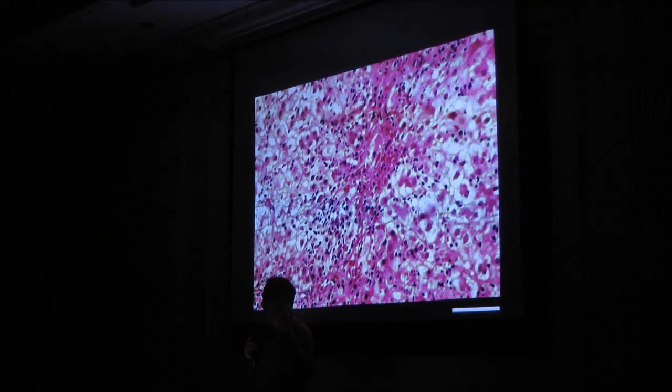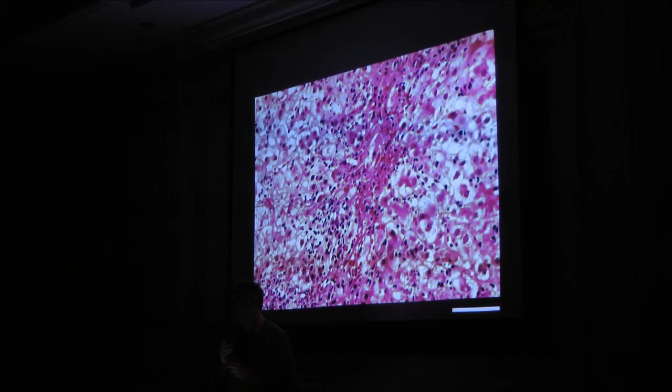Okay? So, what Prishtina needs, what Kosovo needs, is what happened in Barcelona. We got a lot of help, a lot of collaboration from people like Frank Gehry. All the international architects came to us and helped us to collaborate. So I said yes to come and to collaborate. So we are a liquid, remember. You do something wrong in Kosovo, it happens in Barcelona, it doesn't work. We are linked, we are one. In the civilization of empathy, we are one.

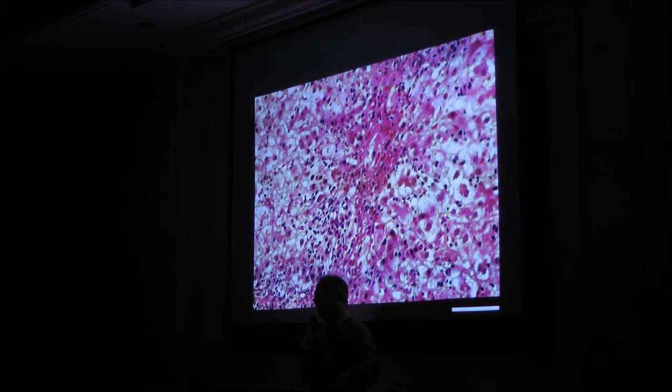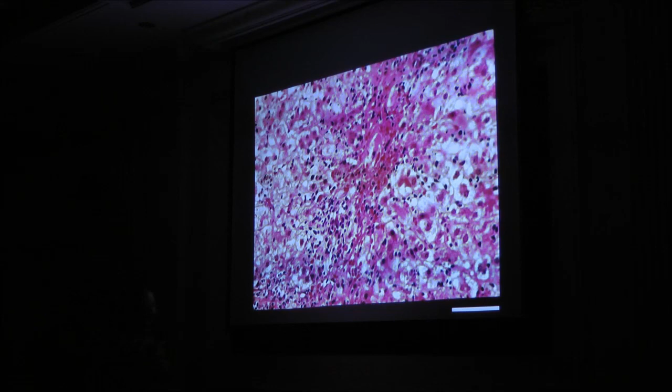When Mr. Putin closes the gas to Germany, the stock market of Barcelona goes down. When someone finds children working in China for Nike, it goes down in California 15% in the stock market. It happens in a click. It's very fragile, but it's beautiful. It's transparent, it's democracy. We like it. So, I like him.

The question to you is, if we are a liquid, what is the role of you in that liquid? I came here because this week is a revolution. It is the first time. You have settled a foundation to break ground and change. And a generation can use the platform of the foundation to push the city to change and to change politics. So, I like him because he's a positive virus. Okay?

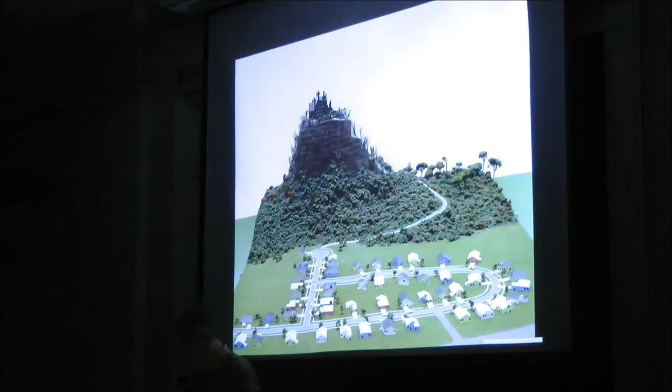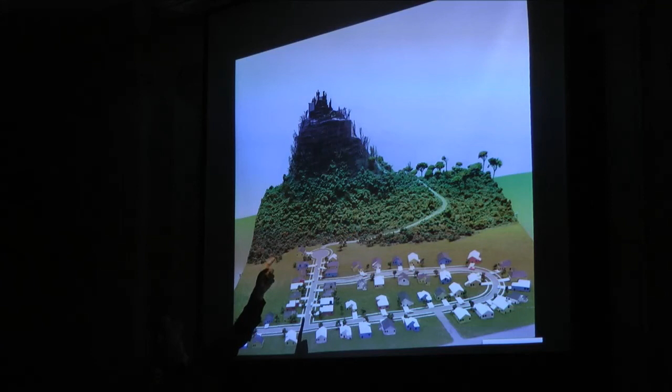I'm suggesting, you know the movie, right? This was his house, his studio, and this was the city. This is like Truman Show. This is Tim Burton and this is Disney. This is IBM and these are the hackers. This is your studio. This is your country. This is this lecture and this is outside. Okay? But this is my studio and this is Barcelona.

This is IKEA. Okay? This is IKEA and these are my carpenters. This is a fab lab of MIT and this is IBM. We need the system. We hack them, they contract us. We need the system, the system needs us. Strange, but interesting. Excuse me?

The bad news. Okay? The bad news is that it's funny, but in Spain we build too much. This is in the north of Barcelona, this is in Empuriabrava. It's built, it's not a movie. Okay? Be careful what you do with your coast. There's an architect doing these houses from the front, from the back, from the right, from the left.

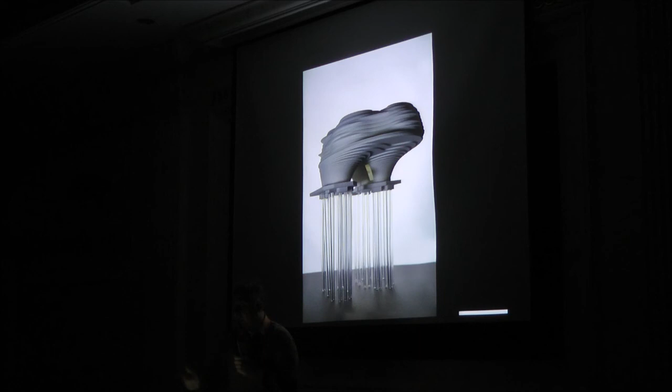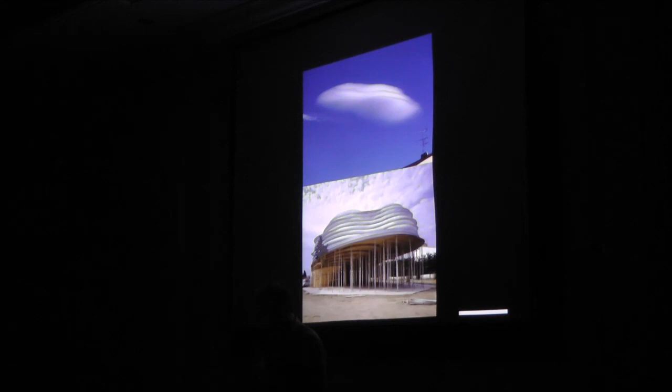That's the wood form. Using parametric design, we're not wasting any wood. Again, more machines. That's a Saturday morning. We are sending files to the machine and the machine is printing. No negotiations, no meetings, no discussions, no convincing. Just do it. One Saturday morning. Little time, not expensive. Done. Just do it. So what's next?

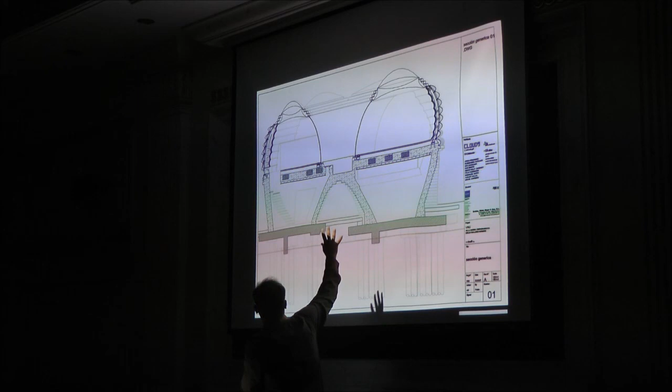How should we continue? So we started with this idea of a cloud. We have beautiful clouds in our region, in our territory. So we have all this technology. We have a winter house and a summer house. We have a daylight and a night light. We have concrete structure. We have curved glass. We have a steel structure. We have a ceramic skin. We have Teflon cushions in the roof. Steel structure, Teflon cushions, and ceramic skin to perform north elevation and south elevation.

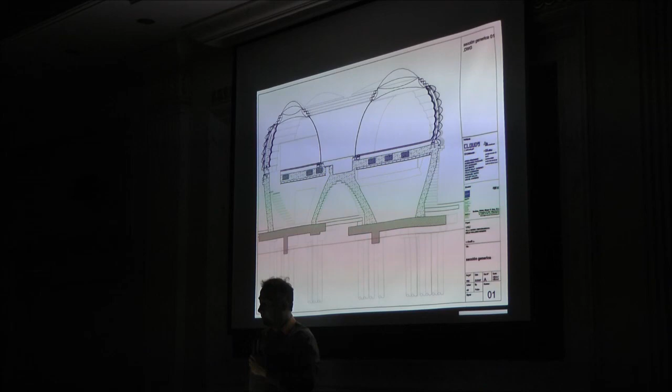It is about concrete, projecting concrete. We are architects of making. I was here with the people of the office shooting concrete. I was here for 8 days shooting concrete. Not designing concrete, shooting concrete. Okay? It's making. We are architects of making.

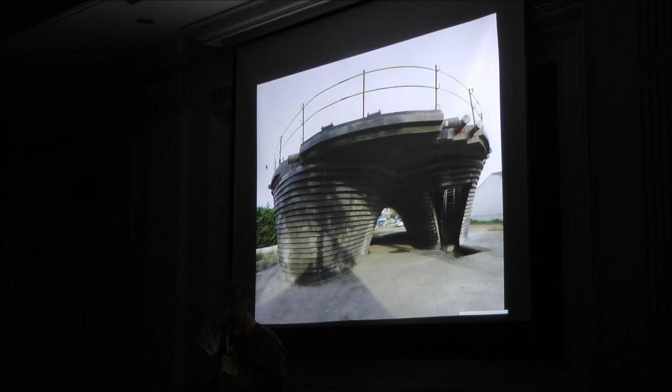Making what? So like our bones and our structure, we have water and installations, and all the pipes are inside our body, the same as inside our house. We have tension like our bones and our structure. And in order to fly, we need this post-tensioned structure that we are shooting. It's a little bit Batman house. Okay? It's important about resolution. So when you do complex geometries, you have to address very well the idea of resolution. What is your resolution? Here is 15 centimeters.

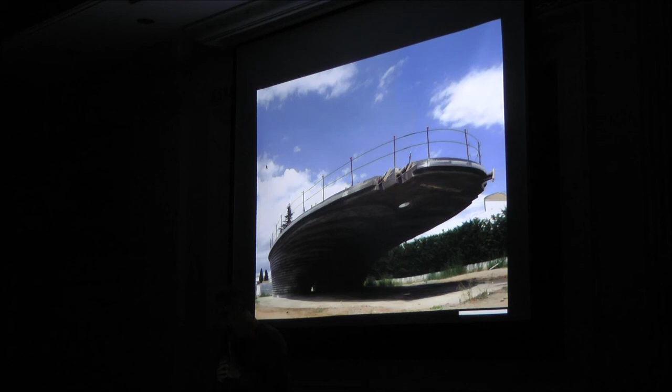To fly. Is it a house? Is it a boat? What is it? So what should the door be? We have a pop culture, and we know that doors can move. So in the Mediterranean culture, the door opens in the morning and closes in the night. So we have a hydraulic system at the bottom that moves the door, 80 kilos, using reinforced concrete. Very light concrete, only 2 centimeters.

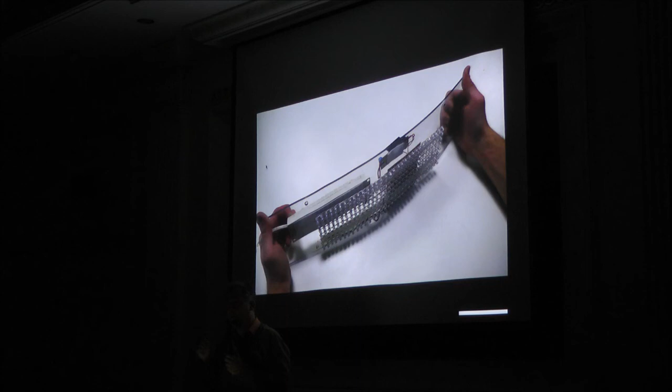But there's one step which is unique and innovative in terms of using translucent concrete. In the back we have an LED panel with an Arduino computer where I can send messages to. Okay? Hello. We are not at home. Who are you? You are not my guest.

It's about complex systems and complex architecture. People ask me, where is Enric getting all this energy from? Well, when I was back in the school in Barcelona, I had Enric Miralles as a teacher. And Miralles was telling us, do you see this croissant? What are you doing? It's breakfast. Yeah, do you see this croissant? Yes. It's not a croissant, it's a building. It's a croissant, yeah?

So for 3 months we were freezing the croissant in the fridge at home, we were cutting the croissant, we were drawing the section of the croissant, and the croissant has an inside space, has a structure, has temperature, has energy embodied, is a material, has humidity levels, and maybe has people living inside like microbes. If it's 1 day later, for sure. So it's a building. This is our generation. We can go to our clients and say, it's not a croissant, it's a building.

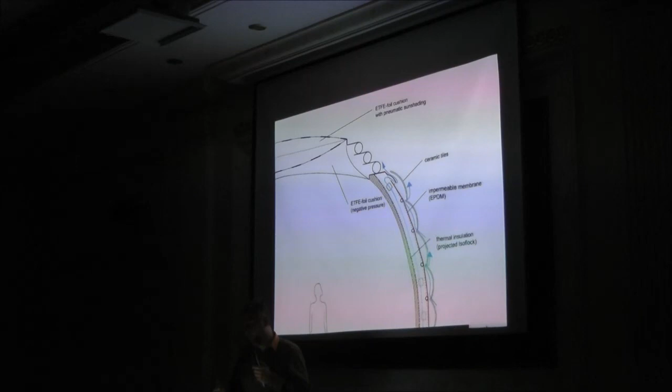What about the ceramic? So in this moment we invited Frederic Amat to join the design with us, an artist, a ceramist, and Toni Cumella, both designing a curtain wall which operates with a strong chimney of air, really warm and heavy. We're using parametric design, they are all the same but not the same. So before building, I suggest you to do that. Do a simulation, do testing, do prototyping.

What you see here is a projection of Villa Nurbs in 3D projected over Villa Nurbs. Villa Nurbs digitally projected over Villa Nurbs itself.

Yeah? You need coffee? Do you need coffee? No.

So, if I have a camera inside my 3D model in a position X, Y, Z, and I know the angle of my camera, and I put in the same X, Y, Z position a projector with the same angle of projection as the angle of my camera, agree? I render this and I map this render over itself. Yes? So, that night we were shooting the mesh of the ceramic before building with the client, and I was showing, there's a window here. Oh, cut, reduce, enlarge, scale. Shoot. No. Another.

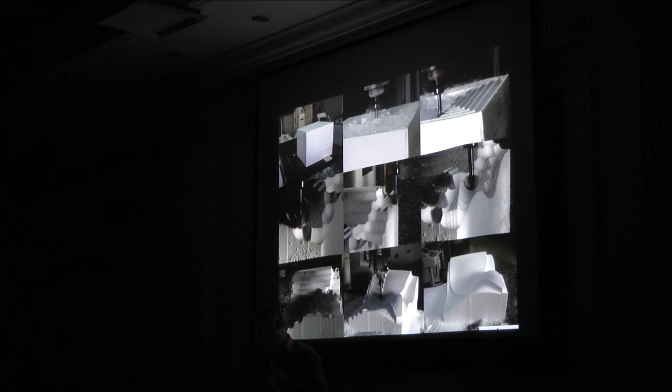We have complex systems like ceramic, like molding, so we are able to do flat surfaces, unfold, back to fold. They're all the same, but they're all different. One mold, one piece. And this is the artist creating a mesh. He's doing landscape, painting each one. So architecture can host art and must be a platform to host contemporary culture.

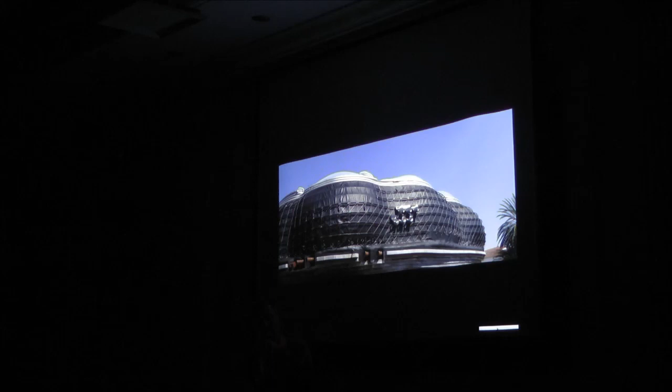This is a skin of ceramic. So ceramics are not screwed to the wall like our skin is not screwed. Our skin works in traction and it's wrapping our body. So the skin is wrapping the building, the body, the house with cables. This is a monster.

Frederic said, "Are you sure you want me to design the skin of a house?" Yes. "But I will kill your architecture." Yes. So, again, you are my friend. Are you sure you want me to do this? Yes. Does the client agree? Yes. Are you sure you want me to do this? Yes. But I will kill you. Yes. Are you sure? Yes.

Yes, just do it. I was at the opening in Sao Paulo of the big dome that Oscar Niemeyer did with the artist Tomie Ohtake. You know this white dome? And there is a red artist sculpture inside. I was there at the opening. So the friends of Tomie were entering through this door and were saying, "Wow, art is much better than architecture." Okay? And I was like, of course.

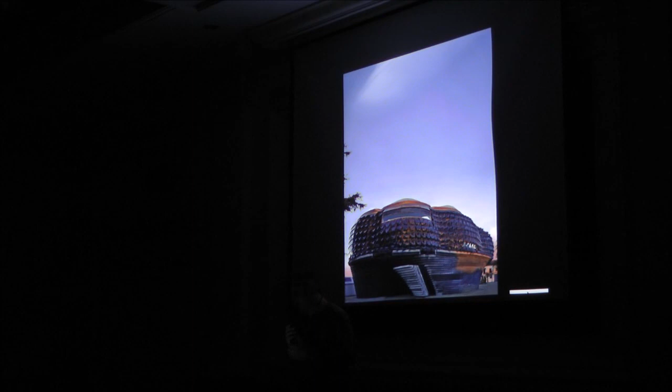But in this door, the friends of Niemeyer, Oscar, were also coming in. "You use art so well. Architecture wins." So it's possible to do architecture and art win-win. It's possible. It's risky, but it's possible. If we do that, we will host society. We will welcome society because society needs a platform to express.

It's imbalance, but it's strong. It's where arts and crafts meets technology. It's difficult, but it's possible. So what about the North elevation? Here we are using Corian, one element, one byte, one object, all the same, all different, and we are using machines.

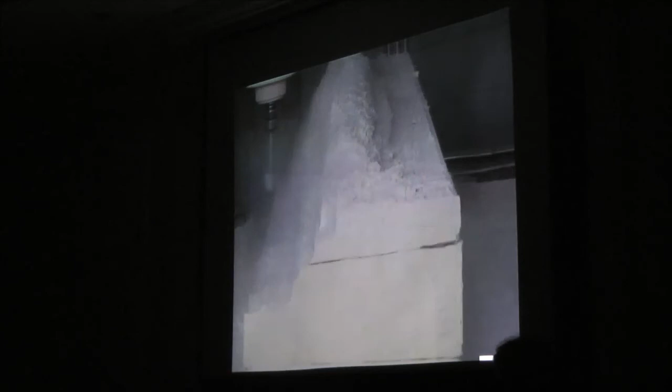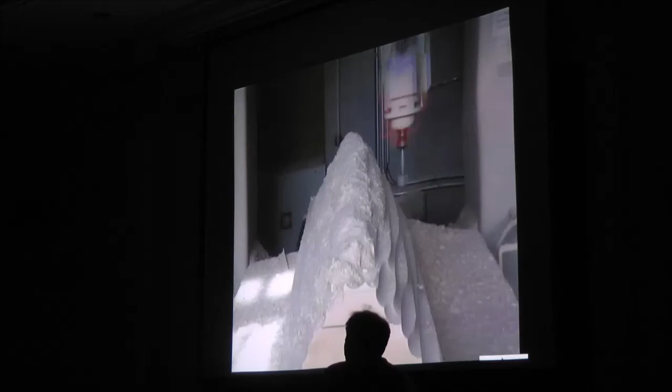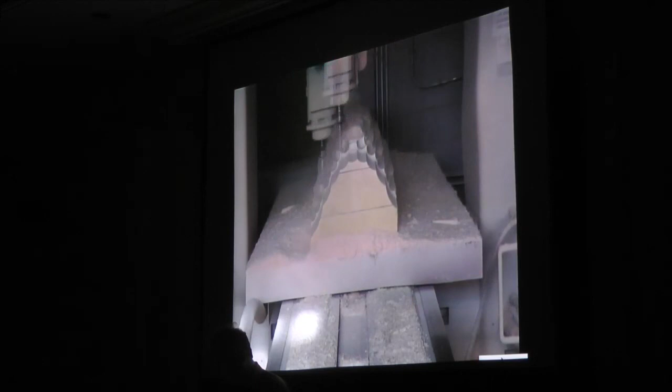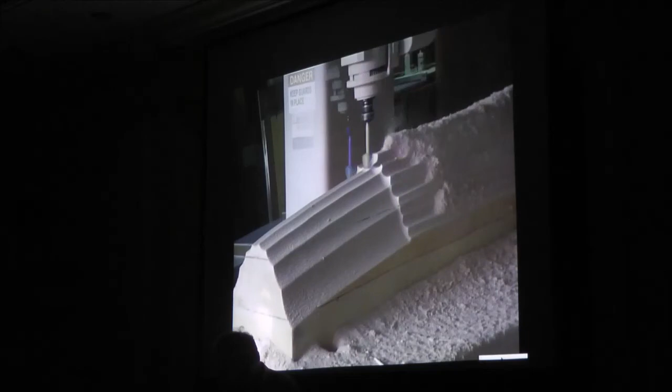No discussions, no meetings, just do it. I do a drawing, I convince these people, I explain, I have a meeting, there's another meeting, who is late, another meeting. But we are taking the responsibility to build, we are designers and makers.

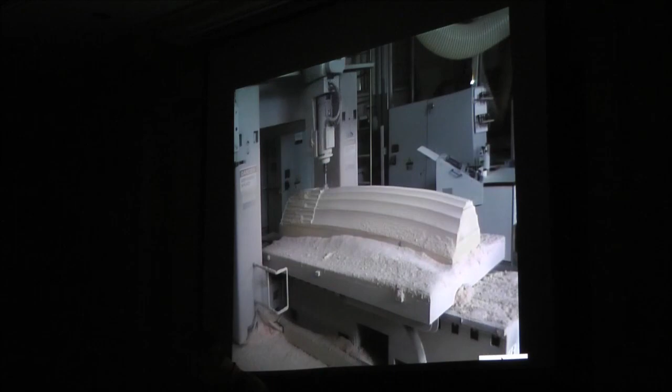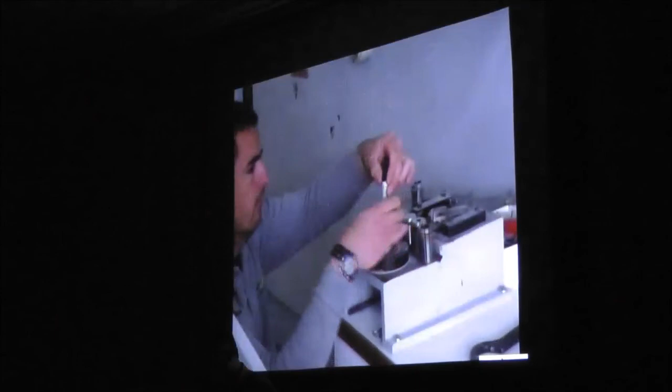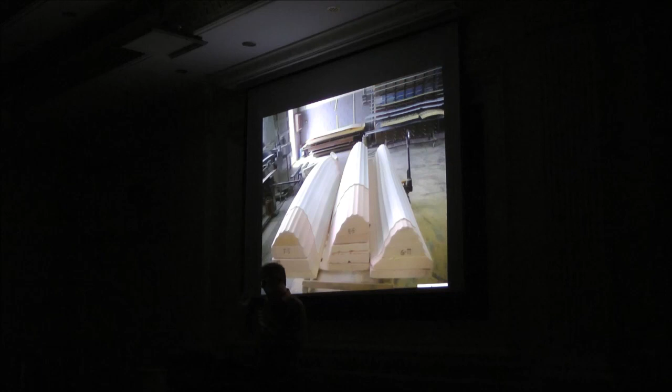Just do it. 6 millimeters of Corian, translucent, to produce the cloud. A cloud. Using cables, translucent. Half of the neighbors, they say it's landing. The other half is saying it's not landing, it's taking off. But in this place, it's an attack. It's a positive virus.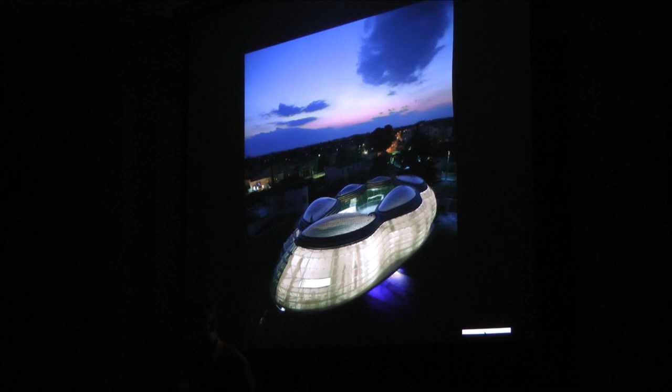People come to us and they say, we didn't know this is the future. And we say, it's today. It's not the future. Today technology, today architects, today clients, main material, it's today.

Can I have a little bit of lights? Just a little bit of lights. You guys know this is Barcelona, yes? Who invited me? You invited me, right? No, less lights. Where are you going? Less lights. No, little lights. Little. Only this one, no, only the center one. You can find. Sure. Just make it. Over here. Come. Oh, okay. This is like on TV. Do you find it? No. Try. You will find that one.

So, you guys know Barcelona? You know Gaudí? Okay. Smart building. Congratulations. So we were talking about that. So basically, you guys know this building, yeah? You know Gaudí? Okay. And who knows Jujol? No. Okay. So this is the work of two people. It's collective authorship. It's a retrofitting of an existing residential building. There was a building. It's a retrofitting. It's a new skin, a new roof. And Gaudí said, I'm going to put some masks on the balconies. And he did. All the Japanese go to Barcelona, they film, oh, Gaudí. They don't understand anything. Okay?

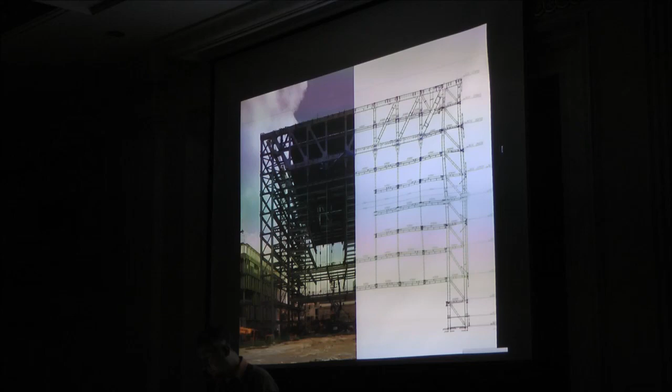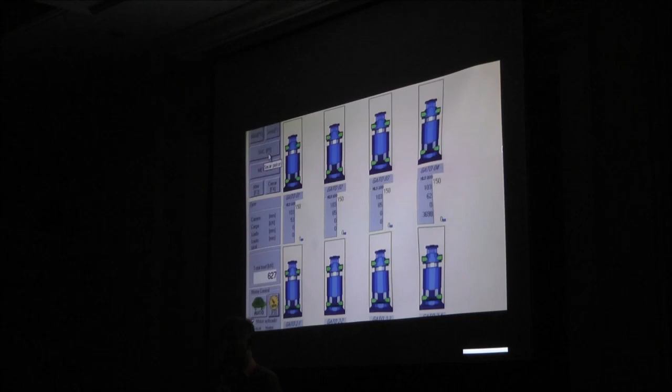So, all the floors are hung from this big truss. Okay, you see that. This is when we started. This is the star architect, but it's not true. The real star is this guy. And the real stars are these 8 robots working together to balance the structure. So we are lifting the structure using cables. This is 320,000 euros cheaper.

Normally you do a secondary structure, then you build your building on top, and then you break the secondary structure down. What we did was we worked 3 months down, so no problems of security, everybody's safe, 4 meters high, and in 1 day, all up. These robots are cheaper. Less time, less risk, less material, less structure. So the construction companies are ready for this challenge of digital architecture.

These are the nuts, what we call flowers. We are against this. This is a centralized system. If this collapses, the building collapses. Imagine a wall with 1 cell phone. Imagine a wall with 1 computer. Imagine a wall with 1 structure. We are distributed. So what's very important is that we move from centralized to distributed. This is a distributed structure. Our building is a distributed structure.

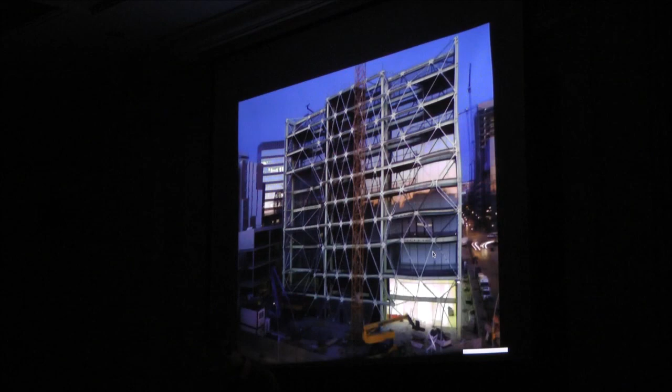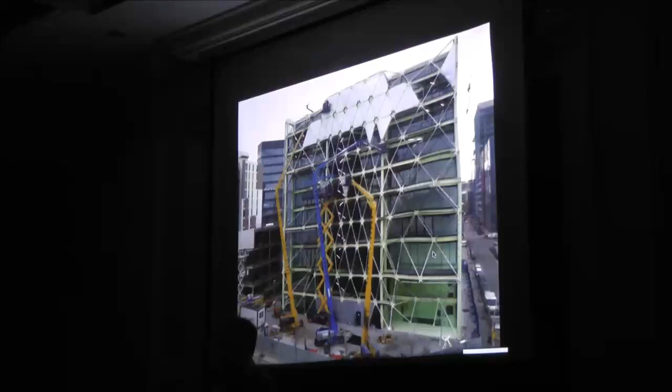So, we are building a second skin to protect the building. This is exactly 4 people using Teflon. The thickness of Teflon is 200 microns, it's 0.2 millimeters. You invite an architect to come here with a building that the thickness is 0.6 millimeters of material. Are you crazy or what? That's what's happening. You are inviting an architect with 0.6 millimeters of material. That's the thickness of our architecture.

So energy. We are in global warming. It's bad news. It's good news for the tourism and bad news. When I was a student in high school, summer was August. When I was a student of architecture, summer was July, August, September. Now I am a father with children. Summer is 10th of May, 11th of October. I'm not talking about crazy Germans on the beach of Barcelona in May. No, I'm saying the beach is full and we are all there swimming. So if someone thinks global warming is not happening, sorry.

In 2000, the line of desertification was in Morocco. In 2010, the line of desertification in terms of temperature went up to Malaga. Part of Spain is now, in terms of performance and weather and temperature, Africa. In 2020, this line will be near Catalonia, in the Ebro river. Half of Spain will be a desert in 7 years, in terms of temperatures.

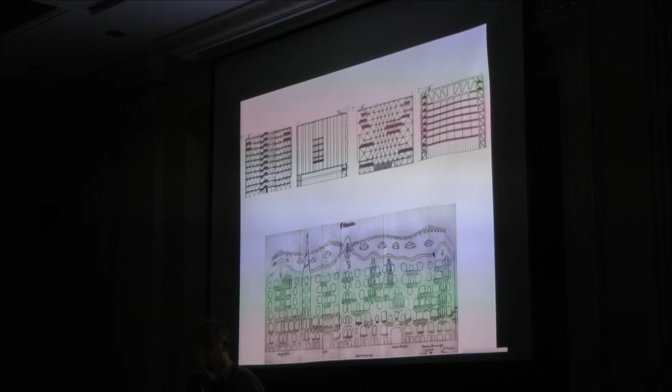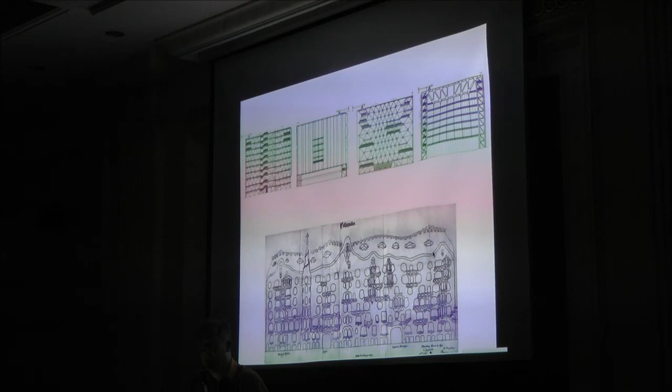We have a new code of construction in Europe, which is saying save energy 15%. It's a new code, it's 3 years old. All countries are doing it. Please save 15% of energy by law. But Kyoto is 20%. So the new law is less than Kyoto.

Imagine. And when all the prime ministers meet in Copenhagen, they are going to sign the protocol of Kyoto. Me, as an architect, I think, dear Zapatero, dear President, sign. And then he says to me, but your buildings are 15. Why do I have to sign 20? So I say, no, I don't do buildings of 15. I'm going to do buildings of 70 to make sure you sign 20.

Okay? So what you will do in your buildings is a movement so that your country does it. If you don't do it, don't complain about it. They're not going to do it.

So energy in the Mediterranean, in Spain, means this. 80% of the consumption of a building is air conditioning. This is our winter, 2 weeks. Heat is peanuts. Air conditioning is 80% of the consumption. If we want to bring down the energy by 70%, I have to attack air conditioning.

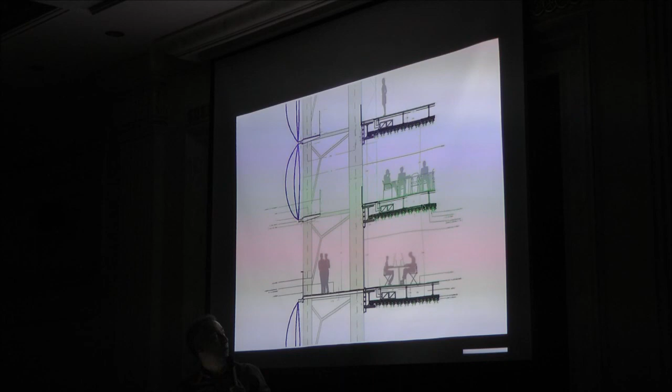So I have created a double skin, glass and Teflon in the front. I like the light to go through, but not the heat. So if the light goes through, I don't need artificial light. But if the heat doesn't go through, I don't need AC. No AC, no artificial light.

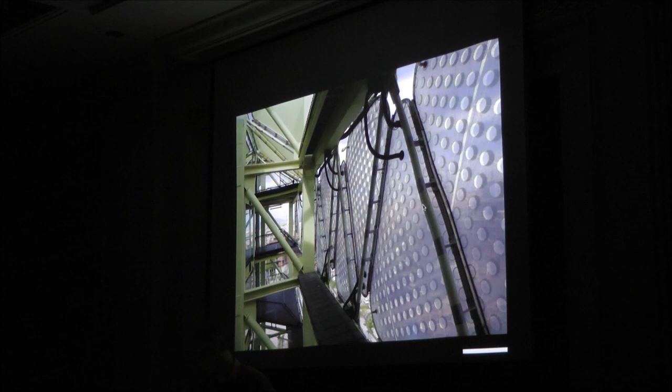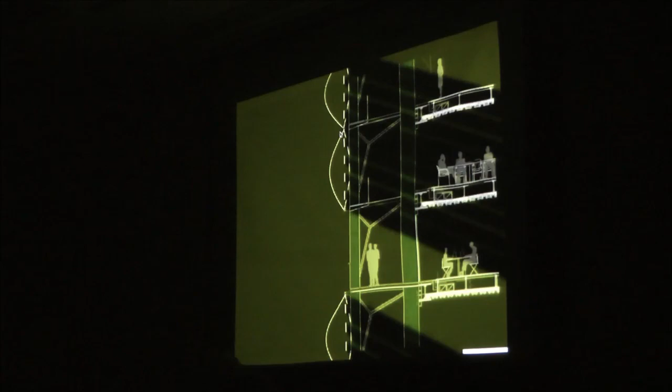So what the cushion is doing is that there are 3 membranes, and the middle membrane is closing. There's a sensor, a luxometer. When the luxometer feels 500 watts heat per square meter, it closes the cushion. It closes the membrane. Only by doing that, we achieve 36% reduction on CO2 emissions. That's almost 2 times Kyoto.

So why not design buildings at comfort levels? Why don't we design a building at comfort level? Why do we have to use all this energy to bring the building down to comfort level?

This is Teflon being used. I was here in 2002. This is by Nicholas Grimshaw. He did these greenhouses, great project, you should go, it's in Cornwall.

You know this place. Barça was here and got 4 from the Germans. So I keep this image to remember. Next time Guardiola is there, so it's going to be even worse.

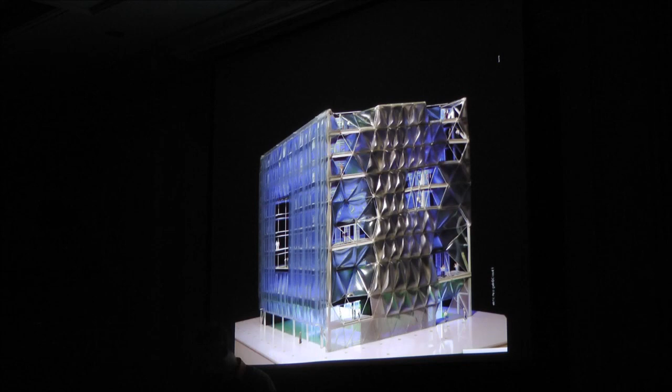So that's the Beijing Water Cube. It's not a performance building, it's an icon building, it's a pop culture building, which also does energy performance. And this is the first time in Spain we have homologated Teflon to be used as ETFE, and it is one of the first ETFE buildings as energy performance buildings, only energy performance buildings. Just do it.

So here we have vertical cushions, 36 meters tall, and here we are using a new technology, using particles. The building creates a cloud, and inside the cushions we have this cloud that stops the sun from going inside and consuming air conditioning. Enjoy.

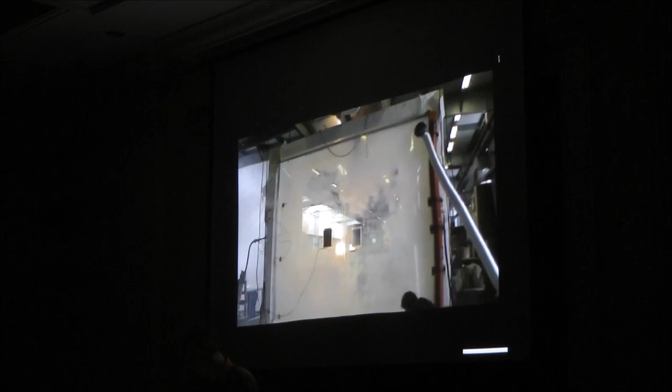This is sensing how much light goes from one to the other. As you can see, it doesn't work, it's a mess. But the director of Vector Foiltec is very happy. I was thinking, my God, if this is Germany...

So again, remember, we are a liquid. Made in Germany, we are a liquid. It's one thing. We are one thing.

So this is a prototype on site in the building performing. When the building feels 500 watts per square meter of heat per hour, it shoots. So in the peak of summer, when the building is going to consume a lot of air conditioning, the building shoots the cloud, creates the cloud. Here you see the shadow.

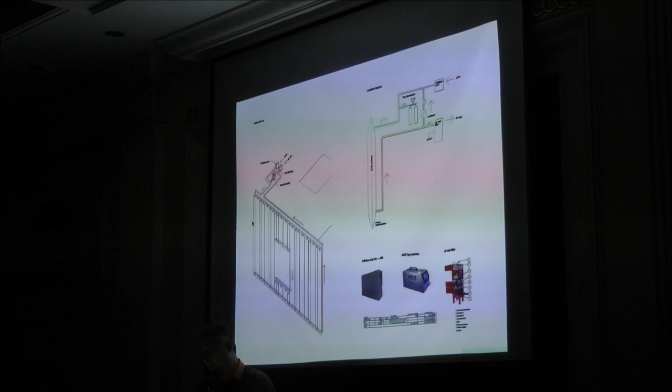We're using nitrogen and natural oil. So we are creating the cloud, it goes inside, it stays for 3 hours, that's the peak of the heat, no use of air conditioning, and then after that we have to recycle the cloud and shoot the nitrogen back to the atmosphere and filter that oil and recycle the oil and reuse the oil again. This is the other skin where we are using a membrane pattern, which is using the luxometers.

The building has about 600 sensors to reduce consumption. When there are people moving, we have lights. Lights follow people. Every movement has 3 phases, and we are in phase 2. It's a radical moment. It's a moment of law, regulation. The building is on top of society, and the building follows society. This video is by Victor Llanos from the office.

She's alone in the building, but she's not alone. She talks to the building. Do you see me? I'm here. Sensors to stop the, I want the lights on, but this is a glass wall, there's enough light in the first 3 meters, 500 luxes at the table, at the desk, no need of light, so the building will not turn the lights on.

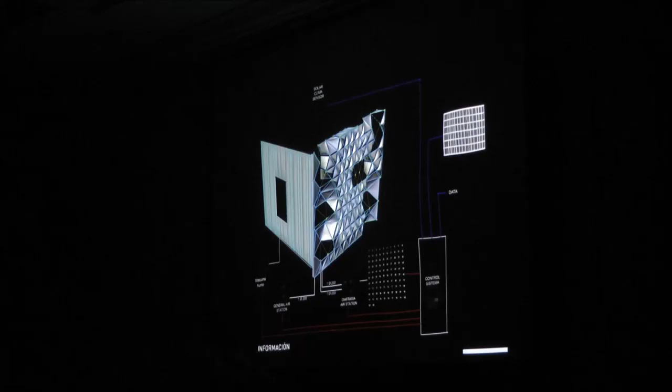So this is the Arduino platform. You guys know Arduino? These small computers you can buy online on the internet. It's the revolution. If you have Intel, it's one thing. If you have Arduino, it's open source. You can download the script from the internet. It's $8. It's a strong performance. It's smart. In this building, we spent 80,000 euros on all these smart devices. In a building of 23 million euros, 80,000 on smart.

Smart is cheap. The engineers, they talk too much about it and they become expensive. But a sensor that activates lights with my voice is 2 euros. The engineers would like 20,000 euros to put it on. But that sensor is 2 euros, okay? It's exactly 2 euros. So intelligence is cheap. Why not embed it? Why not distribute it?

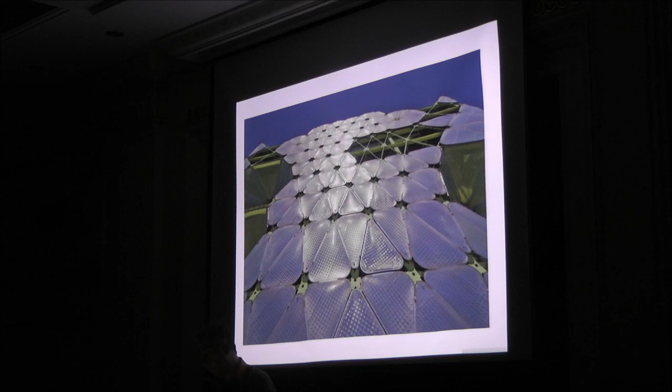So each cushion has one sensor. Instead of having a central unit in the roof that operates all the building, if that unit collapses, all the building collapses. Instead of that, 104 computers in the skin, one by one. That's what we call distributed intelligence. Even for fire, these are different awards we got to use ETFE. But the bigger one we are most happy with is this.

The building is category A in terms of energy, which means 72% reduction of CO2 emissions. And because we have monitored results, sometimes the building is net zero, sometimes the building is 95% reduction of CO2 emissions. So I'm teaching at the AA, okay? And I am teaching green agenda. And the students know that the building is E. They are looking at the building, right? It's E, and you are teaching A. What's the problem?

Reality is now very, very, very low compared to our knowledge. We are breaking reality with a very strong knowledge. Never, never, ever in society did we have so much innovation, so many patents, so much education, so many languages, such good papers, and so little reality. Okay? So please change reality.

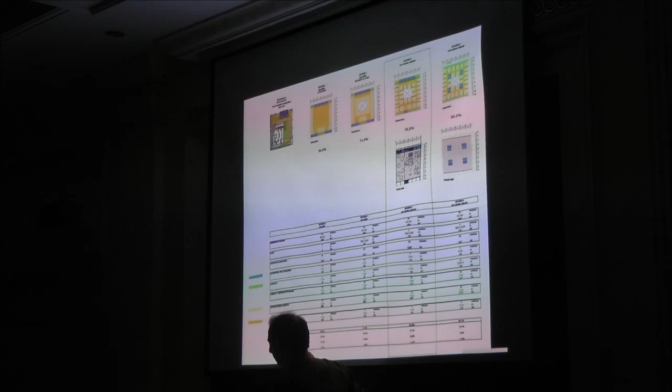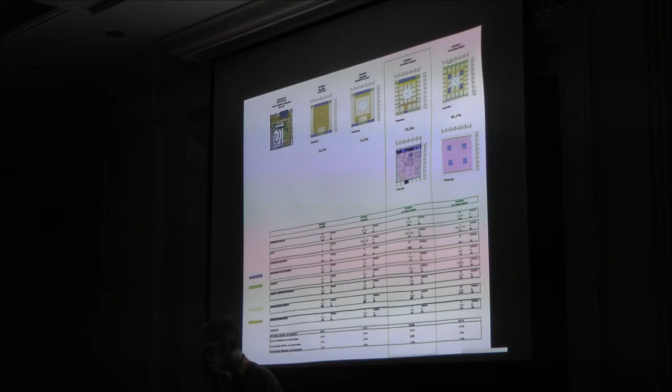If you know, in an office building, the communication ratio is very important. This is Kevin Roche, the Ford Foundation in New York. You guys know the building? Ford Foundation in New York. It's the world record of the communication device. It's about 12%. 12% of the program is used as vertical communication. So we wanted to kill these numbers, and we have achieved a 9% core communication. Use the computers. We have all computers, so use them.

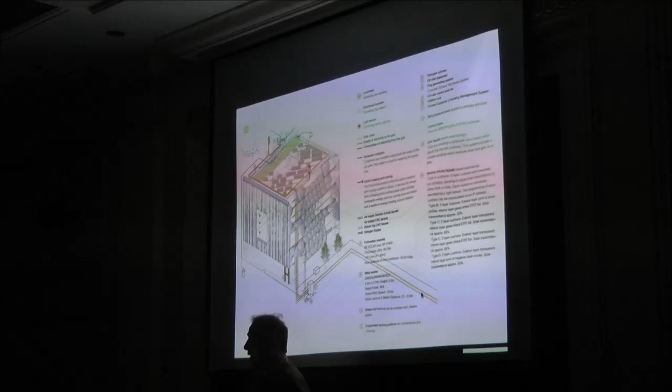So basically, the end of the lecture. We have achieved very strong architecture, but we have to know about green gardens, we have to know about nitrogen, we have to know about Arduino, we have to know about fog, we have to know about district cooling. We are architects of this opera. Buildings are operas. Masterworks, with a lot of complexity. Now we are the directors of this opera. That's the building. Welcome to the building. That's the book, 7 years of knowledge at your disposal.

Open source. When I go to Princeton, for instance, I know the students, they pay about $58,000 to be there and to be with me, and they pay me a lot of money for the lectures, but 3 hours later, my lecture is on the internet for everybody. So I said, excuse me guys, are you crazy? You are paying to be with me, to share this, to have this knowledge, and now you put it online for free for everyone.

This generation is doing that. It's living by sharing. Okay? That's why I'm here. This is living by sharing. Thank you.